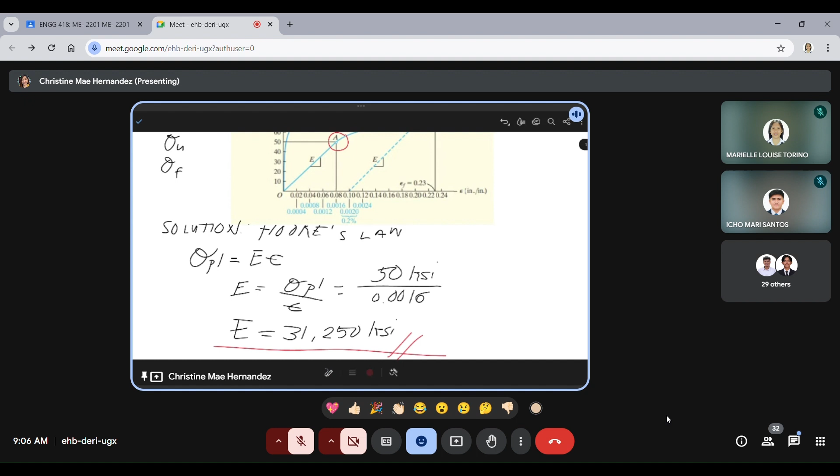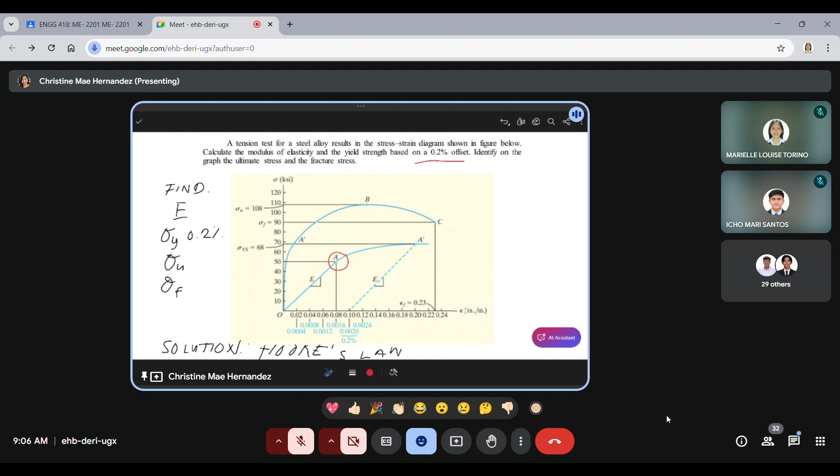Okay, next. Yield stress or yung ating yield strength based on 0.2. So sinabi naman na 0.2%. Di ba after proportional limit, pag sa yield strength, yun ay malapit na sa or tatawid na sa plastic region. So ano yung yield strength based on 0.2? Based sa graph ulit, ito, A prime. So nakalagay naman na itong 0.0020 is naka-offset na siya ng 0.2%. So lagay lang natin na 68. So yun na yung answer, 68 KSI. So base lang tayo sa graph, no? Madali pa lang, tingin-tingin lang tayo sa graph.

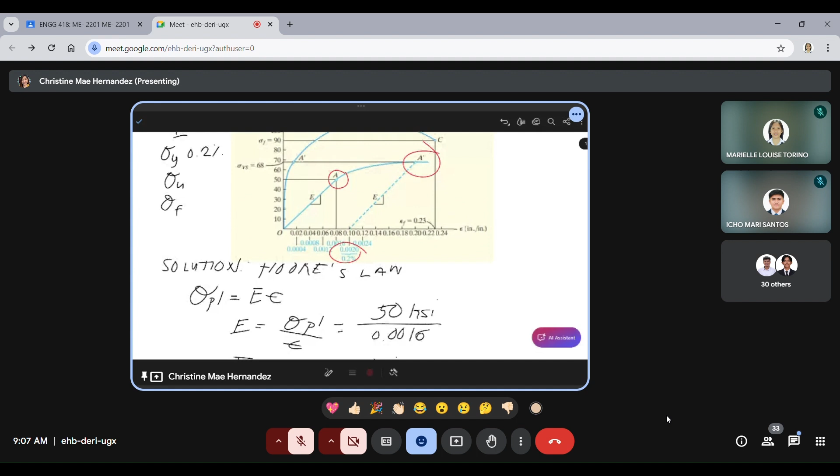Next, ultimate stress. Pag sinabing ultimate stress, maximum load, maximum stress, ano yung pinakamataas na value dito sa graph ng stress? So ito yung stress, di ba? Ano yung pinakamataas? Point B. So yun yung ating answer for ultimate stress, yung maximum load na nakakarry ng ating material. So, 108 KSI.

Next, fracture stress. Pag sinabing fracture stress, ito na yung end ng graph. Okay, sira na yung ating material. Pag itong stress na to, 'di ba, nag-ultimate siya, tapos bumaba na siya kasi malapit na siyang magsira kasi nagne-necking na siya. So kumbaga ito yung end point ng ating graph. Alin ba dito yung end point? Yung point C. Okay, so ito na yung pinaka-last. So, point C, fracture stress is equal to 90 KSI.

Okay, so ito lang yung ating problem number 1. May isa tayong kinompute using Hooke's law kasi sa elastic region lang, and yung iba based on graph lang. So, may questions ba? Clarification sa first problem?

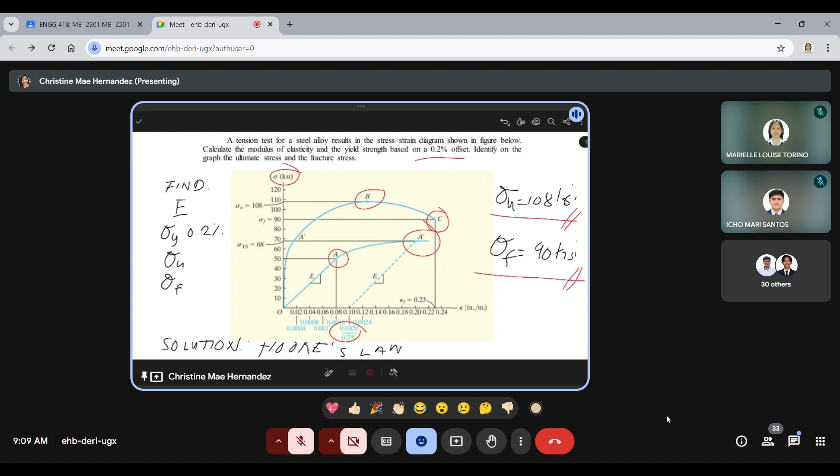Next. An aluminum rod shown in figure A has a circular cross-section and is subjected to an axial load of 10 kilonewton. If a portion of the stress-strain diagram is shown in figure B, determine the approximate elongation of the rod when the load is applied. Take the modulus of elasticity as 70 GPa.

Find. So, ang unknown natin is yung elongation lang ng ating rod. So, solution.

So first, ano bang formula for deformation? Di ba meron tayong formula na deformation is equal to strain times the original length. So, original length, given naman siya, check. And yung ating strain, nawawala.

So pwede nating computein yung ating strain using, ano bang formula for strain? Pwede siyang stress is equal to modulus of elasticity times strain. So ito yung unknown, 'di ba? Dito yan. Then modulus of elasticity, meron namang given. So check. Ano nawawala?

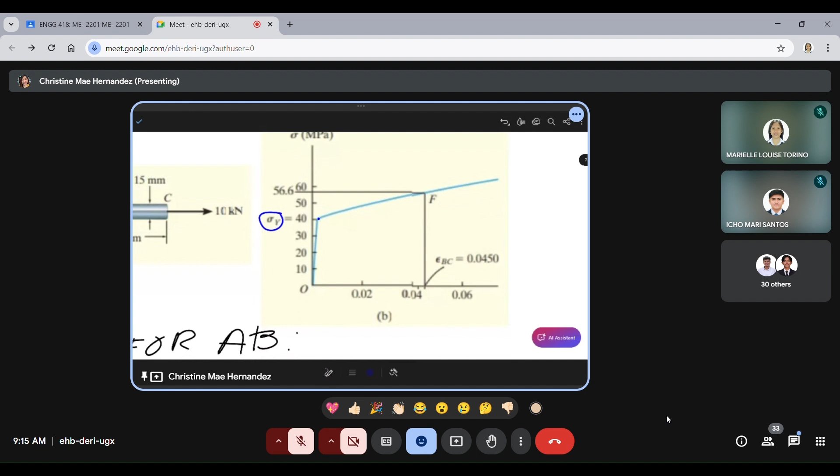31.83 MPa, yun yung nakuha nating value, less than sa yield stress natin na 40. Diba? So anong gagawin mo? Applicable dito yung Hooke's Law kasi nasa elastic region siya. So using Hooke's Law, so ito yung Hooke's Law. Nailagay ko na itong stress is equal to modulus of elasticity times strain. So Hooke's Law to. Ang Hooke's Law ay pang elastic region lang.

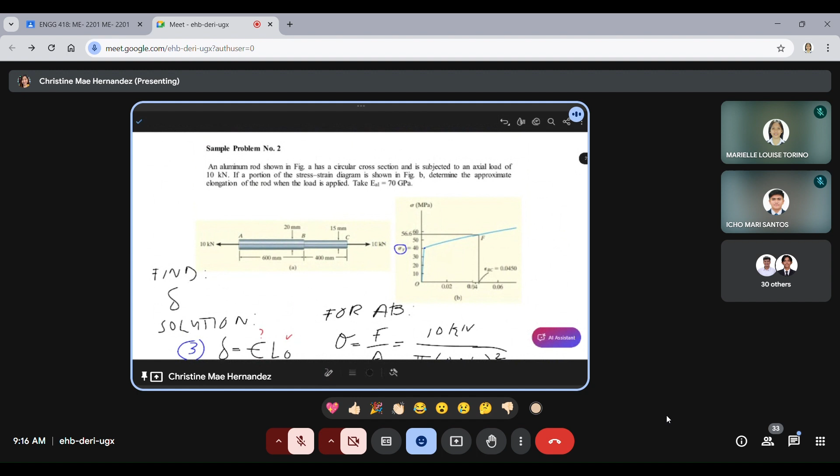So stress, 31.8309 is equal to over yung ating modulus of elasticity, which is yung 70 GPa. So given naman yung ating modulus of elasticity, 70 GPa. So convert natin into MPa para parehas yung ating unit.

So strain is equal to 4.54... 7271429 times 10 raised to negative 4. Tama ba? Hindi ko sure kung 34 to or 70 or 54.

Okay, next, nakuha na natin yung ating strain. So pwede na natin makuha yung deformation AB. Nasa step 3 na tayo dito, step 3, check. Deformation ng AB is equal to strain times yung ating original length. 4.54727142 times 10 raised to negative 4 times yung original length ng AB, sa AB lang, 600 mm.

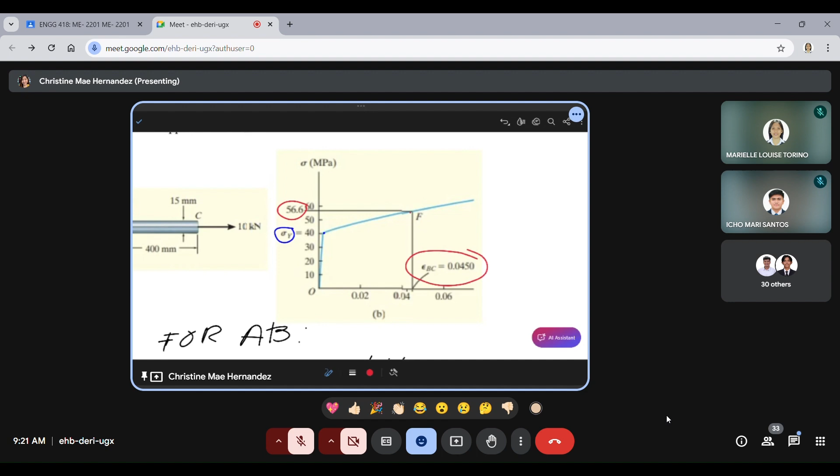So sa halip mag-compute ka using Hooke's Law, diba? Kinompute natin yung strain gamit ang Hooke's Law formula, given na yung ating strain sa graph na 0.0450. So pwede na natin ma-compute yung deformation at BC, using yung strain BC times yung ating original length. So 0.0450 times original length BC, so meron tayong 400 mm.

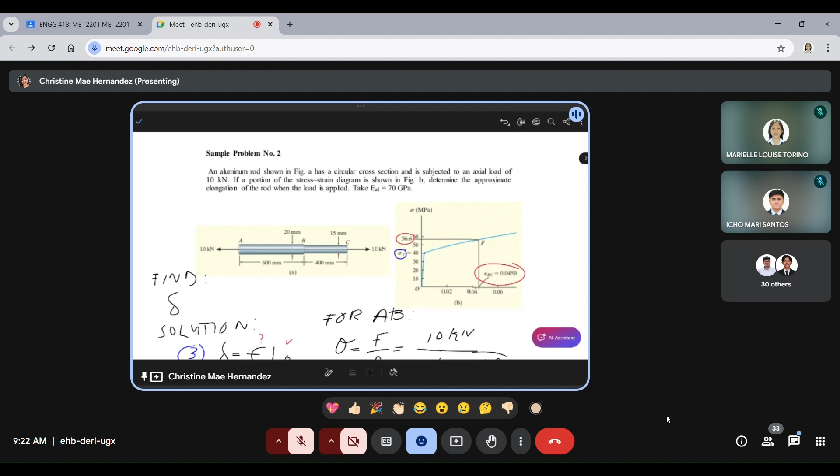So, total deformation at AB is 0.272836... mm, plus the deformation at BC which is 18 mm. So, the total deformation is equal to 18.2728 mm.

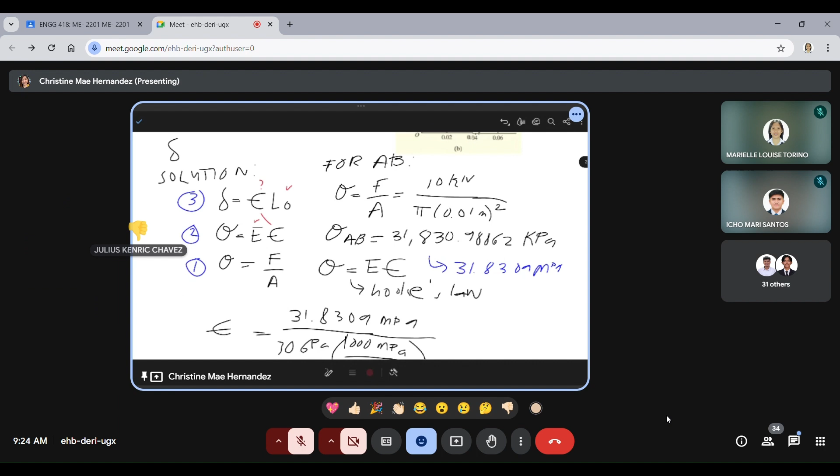Okay, same type of problem. A bar made of A36 steel has the dimensions shown in the figure below. If an axial force is applied to the bar, determine the change in its length and the change in its dimensions after applying the load.

The material behaves elastically. It's given that the modulus of elasticity is 200 GPa and the Poisson's ratio is 0.32. So, for steel too. Yes, steel and steel.

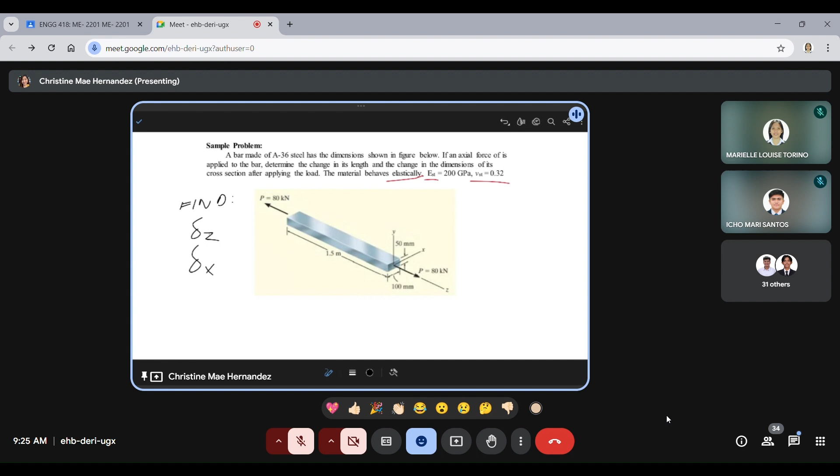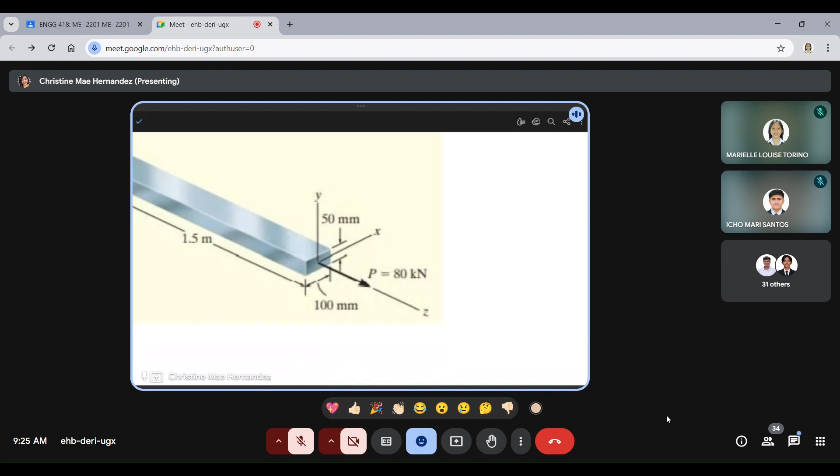So, find the change in its length. When it's change in length, let's call it deformation Z, since there's also change in dimension here. Change in dimensions, that's X and Y. Let's zoom in on the figure. Deformation at the Z-axis, deformation at the X-axis, and deformation at the Y-axis are what we're looking for.

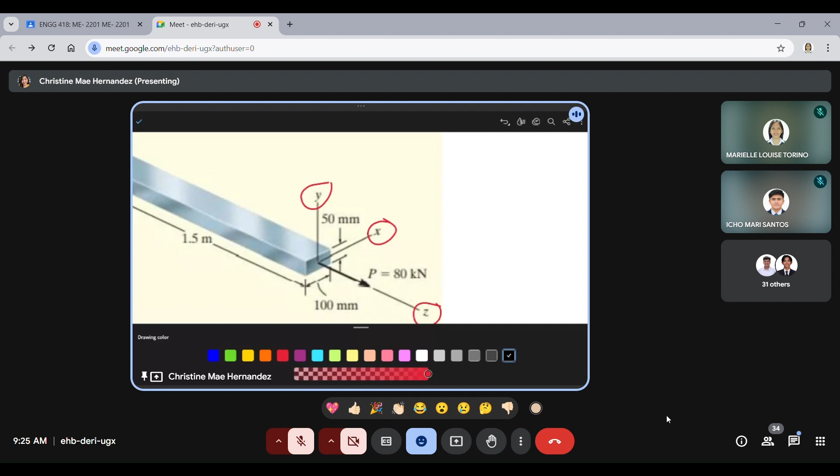So, solution. Deformation again is what we're looking for. Deformation is equal to strain times the original length. That's our first step. Sorry, this isn't actually first. This is third, this is the last step. Okay, we'll get to that later.

Second, we have the original length. So the strain is missing. Since the material behaves elastically, we'll use Hooke's law. Hooke's law states that stress is equal to modulus of elasticity times strain. Then, how do we get the stress? Stress is equal to force over area.

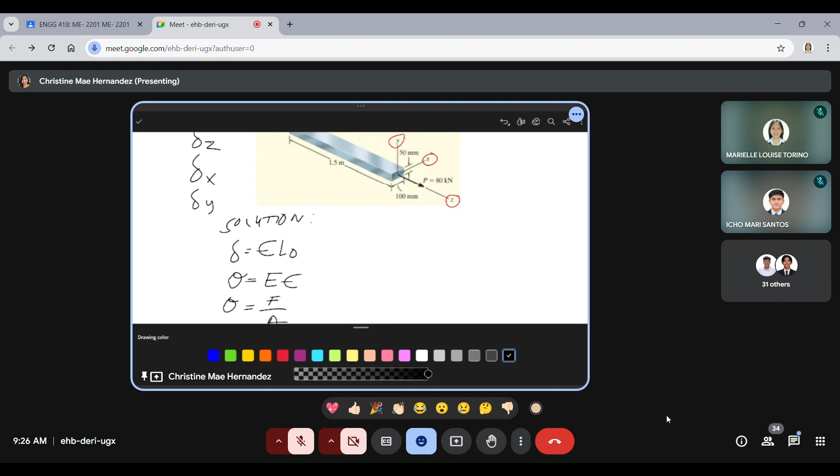Step 1, step 2, step 3. First step, stress, which is force over area. Our force is 80 kilonewton. And the area we're using here is the one perpendicular to our force, right? Perpendicular is what we use. So it's 0.1 meters, this is 100 mm times 50 mm.

So our stress is equal to 16 MPa.

Next, we already got our stress. Step 2 is strain using Hooke's law. Strain is equal to stress over the modulus of elasticity. So, 16 MPa, let's convert it to Pascal since our modulus of elasticity is in GPa. Times 10 raised to 6 Pascal, over 200 times 10 raised to 9, since it should be GPa, we converted it to Pascal. So strain is equal to 8 times 10 raised to negative 5. Okay, we're done with step 2.

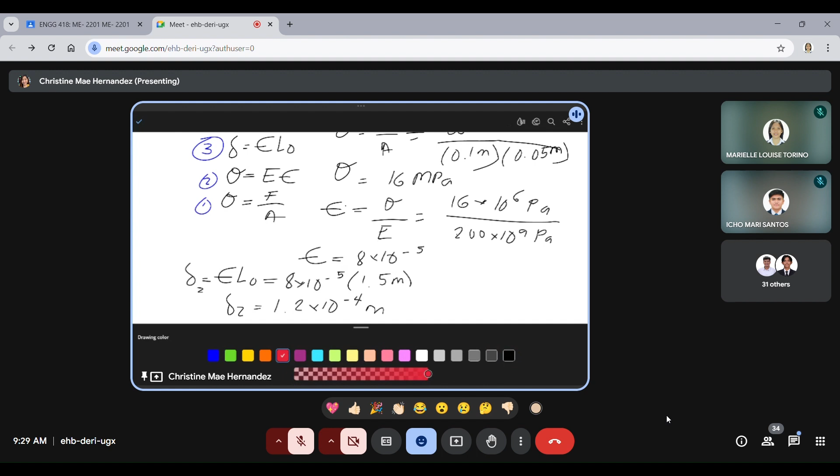So we've computed one unknown, which is the change in length. Now, what's being asked is the change in dimensions. The dimensions are X and Y. Now, we have a given Poisson's ratio of 0.32.

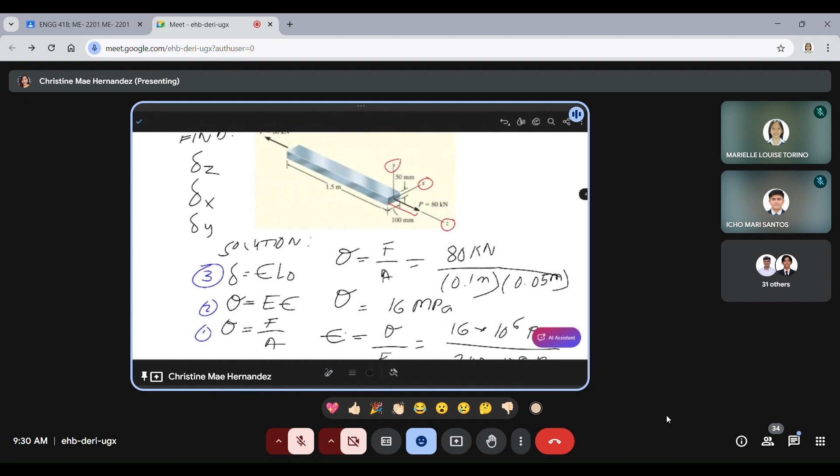So, right, the Poisson's ratio formula is equal to negative lateral strain over longitudinal strain. So here, negative. Lateral, so which is our lateral? That's the X and Y. Right, X and Y are our lateral. So strain X and Y over the longitudinal. So what's our longitudinal? That's our Z direction, or our length. Right, length, longitudinal, so Z.

So, substitute the given values. 0.32 is our Poisson's ratio, minus X and Y, the lateral strain, over the longitudinal strain. We already computed our longitudinal strain earlier, here it is, at 8 times 10 raised to negative 5.

8 times 10 raised to negative 5. So makakompute natin yung ating strain X and strain ng ating Y. So is equal to negative 2.56 times 10 raised to negative 5.

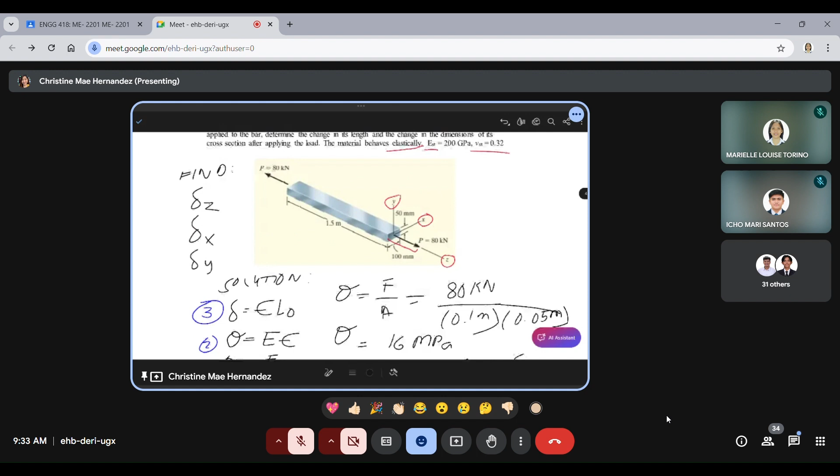So nakuha na natin yung deformation in x-axis. So y-axis naman, deformation at y-axis is equal to strain ng y-axis din times yung original length mo ng y-axis. So negative 2.56 pa din times 10 raised to negative 5. Kaya parehas kasi lateral yung sa atin. Times original length ng y, which is 100 mm, so 0.1 meters. At deformation at y-axis is equal to negative 2.56 times 10 raised to negative 6 meters.

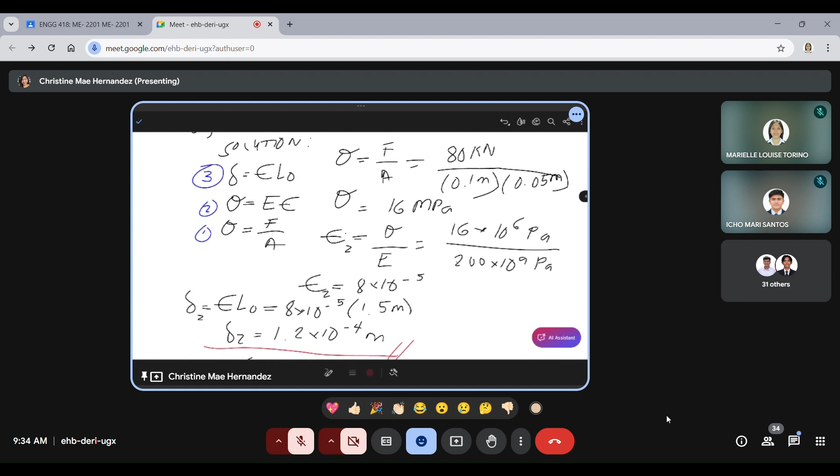So nakuha na natin yung deformation ng ating z, x, and y axis. Unahin nyo lang yung step 1, 2, 3. Then kung ang tinanong naman ay lateral, okay, pag lateral na siya gagamitin nyo yung Poisson's ratio. If wala yung Poisson's ratio, meron din tayong pag given naman yung G, yung shear modulus naman, meron tayong relationship dyan. G is equal to modulus of elasticity over 2 times 1 plus Poisson's ratio. I think next problem natin magagamit yan.

Okay, questions or clarifications para sa problem number 3.

Yes po. Ma'am, if yung X and Y face naman po natin ay slanted, meron po ba siyang ibang formula po yung sa Poisson's? Wala, so gagamitan nyo siya ng trigo. Laging trigo yung ano nyo, so medyo mahirap na pag inislant ko na siya. Yes po, so kailangan lang po na perpendicular po siya dun sa force po. Oo, yung basta yung force, diba, pag slant, basta laging perpendicular pag ang ginamitan ko ng slant. So trigo lang tayo, yun. Ganun lang. Noted po ma'am. Thank you po. Okay, may questions pa?

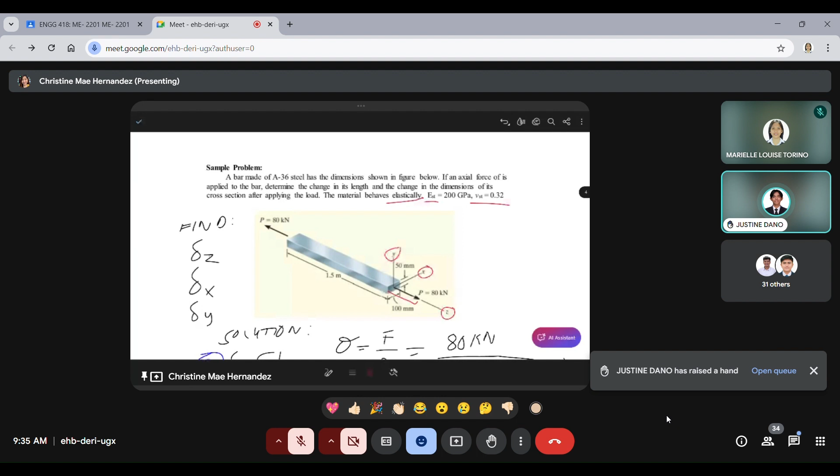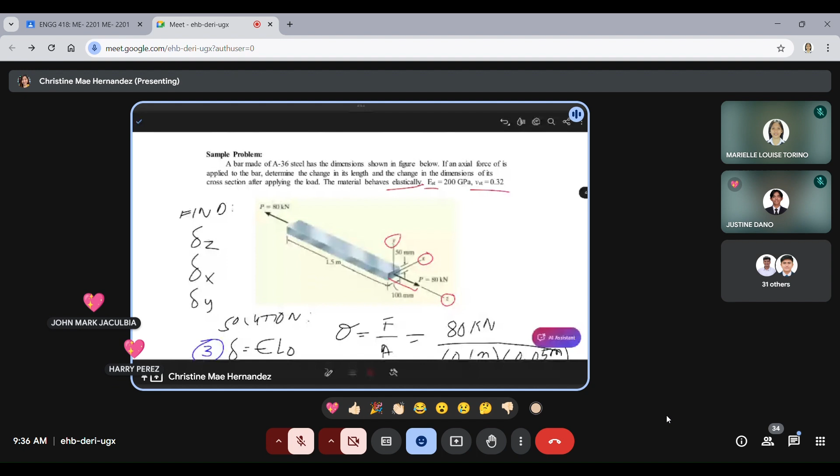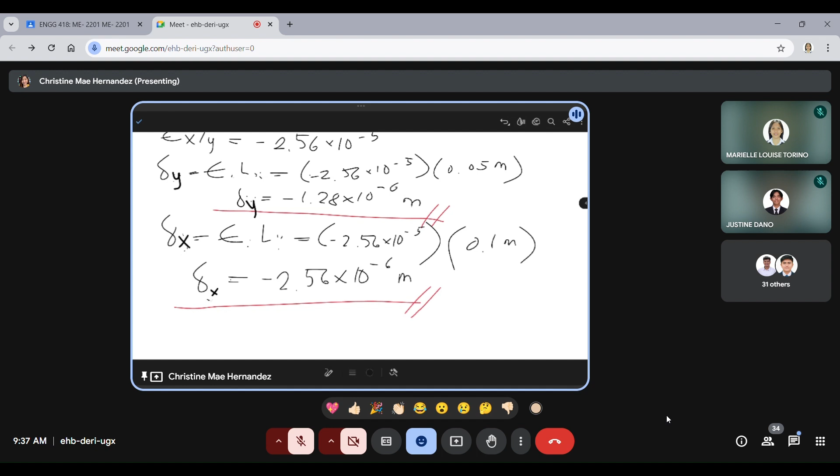Yes po. Ma'am, hindi po ba ang length ng X ay yung 100, sa Y po ang 50? Natin, length ng X ay 100 and sa Y ay, oo sorry nagkabaliktad ako. Sige, tama ka. X ay 100, Y ay 50. Okay, so mali, baliktarin lang natin, sorry na. So X... Ito ay 0.05, so X yung 100 mm. X then Y. Okay, questions pa? Questions? Clarifications? So wala na, okay, so next problem.

Okay, so a specimen of titanium alloy is tested in torsion and the shear stress strain diagram is shown in figure A. Determine the shear modulus G, the proportional limit, and the ultimate shear stress. Also determine the maximum distance D that the top of a block of this material, shown in figure B, could be displaced horizontally. So if the material behaves elastically when acted upon by a shear force V, what is the magnitude of V necessary to cause this displacement? So find...

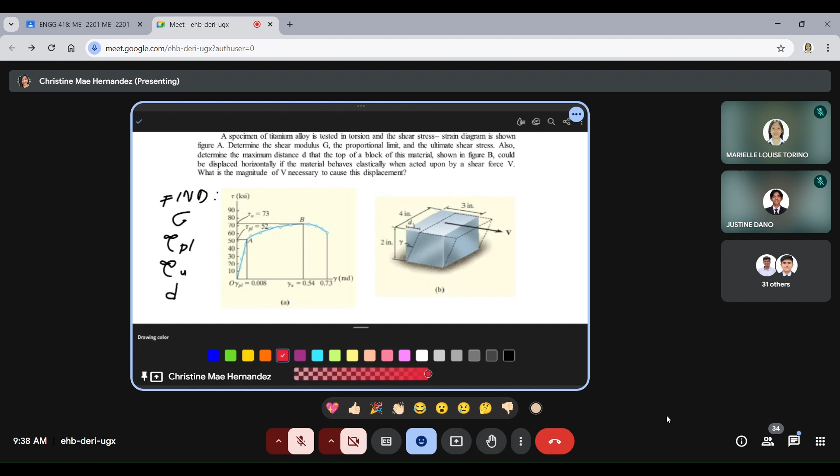Shear modulus G, okay sa shear na tayo. Then proportional limit, so shear to proportional limit, and yung ating ultimate stress or ultimate shear stress. Also kailangan din daw nating hanapin yung maximum distance D, okay, pag dinisplace natin siya horizontally na nag-behave elastically. Okay so meaning elastically, exert tayo ng force V, pag inalis natin yung force V, bumabalik sa original shape, sa original size, and sa original length. And lastly, yung ating unknown is yung magnitude of V.

So ito yung shear force. First, solution. So di ba meron tayong formula na stress is equal to shear modulus times shear strain. Okay, pang shear to, di ba? Kanina pag normal, stress is equal to modulus of elasticity times strain. Eh ngayon ito pang shear. Shear. Okay.

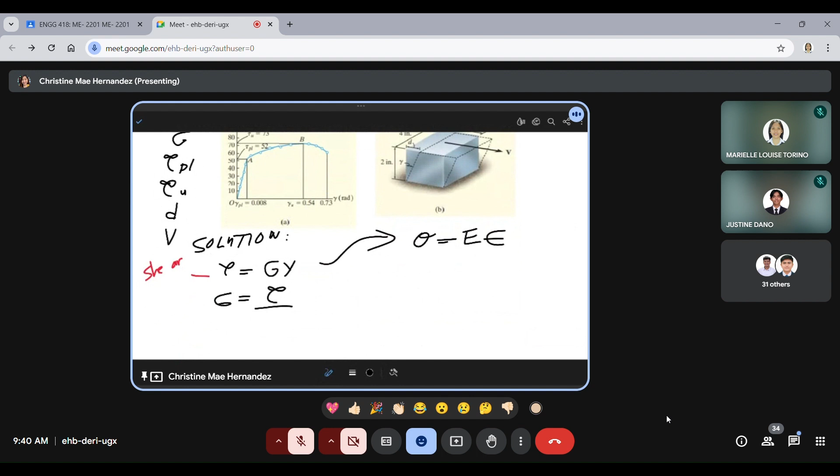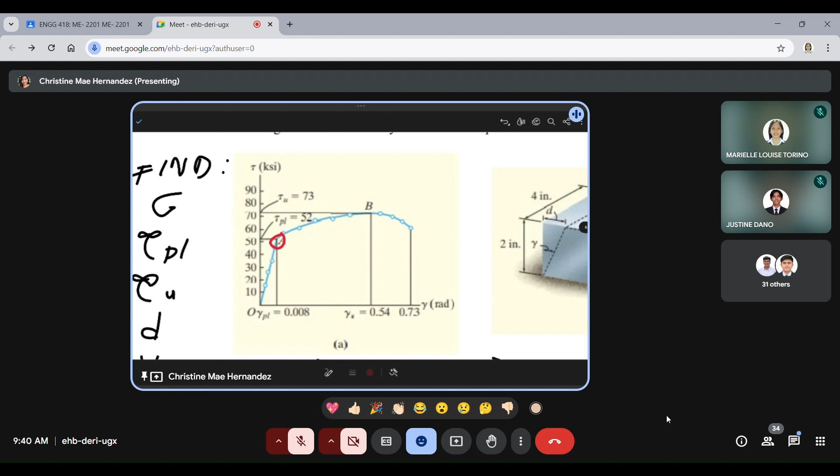So modulus or shear modulus G, ano ba yung shear modulus G na yon? Di ba siya ay pang elastic region, kumbaga parang Hooke's law din to, di ba, Hooke's law din, pang elastic region din siya. Okay, so dito, elastic region, G is equal to tau over yung ating strain. So yung tau natin sa elastic region, zoom in natin yung ating figure. So alin dito yung proportional yung ating stress dapat at yung strain. So ito yung point A, diba, point A. So dito sa point A, ano ba yung tau natin? 52 KSI, so nakalagay na naman na 52 KSI. So proportional limit natin, 52 KSI.

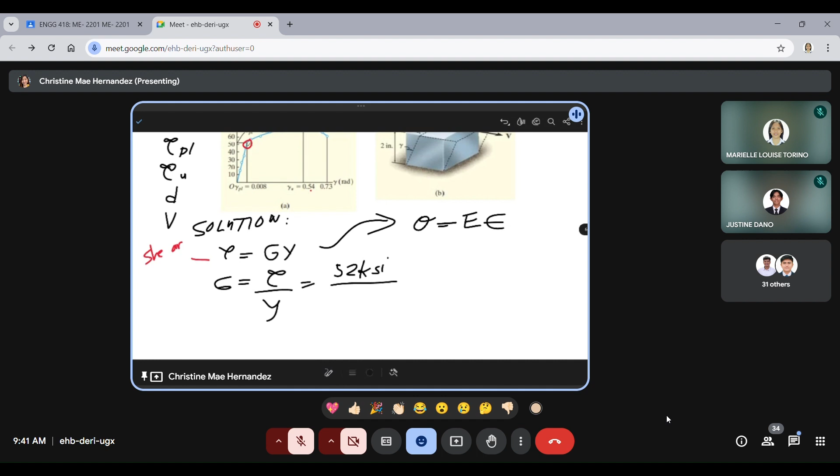Over the strain, so 0.008. So, shear modulus G natin ay equal sa 6500 KSI. Next, we have yung ating proportional limit.

Compute na natin yung G. Proportional limit based sa ating graph. So nakita nyo naman, ano ba? Given na yung 52, so yun na yung answer natin, 52 KSI. Diba? Madali lang yung chapter 5.

Next, ultimate shear stress. Pag sinabing ultimate, siya yung pinakamataas. Diba? Pag naman fractured stress, yun yung pinaka-end na, katapusan na ng ating strain, sa stress strain diagram. Eh pag itong, ang tanong, ultimate stress - pag sinabing ultimate stress, siya yung maximum stress. So alin ba dito yung may maximum stress? Itong ating point B. So ang ultimate stress ay, ito, given na din, 73 KSI.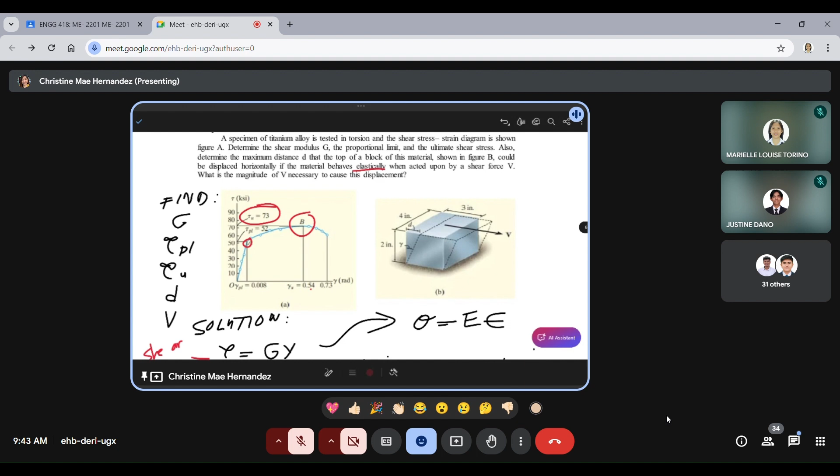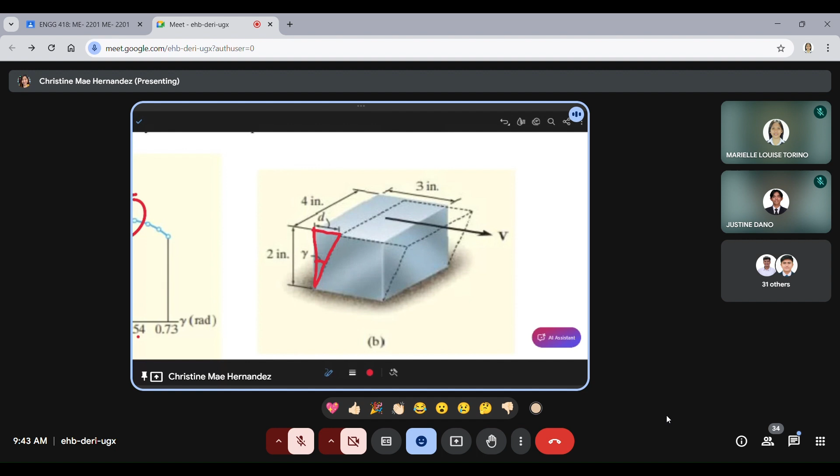Okay, next. So ano naman daw yung distance or maximum distance na na-displace ng ating block pag nag-behave siya elastic? Okay, so dito, D. So diba ito yung ating figure? Trigo ulit tayo. So trigo, we have distance D. Meron akong distance na 2 inch. And meron naman akong strain, shear strain. So bakit? Paano ko nalaman yung shear strain?

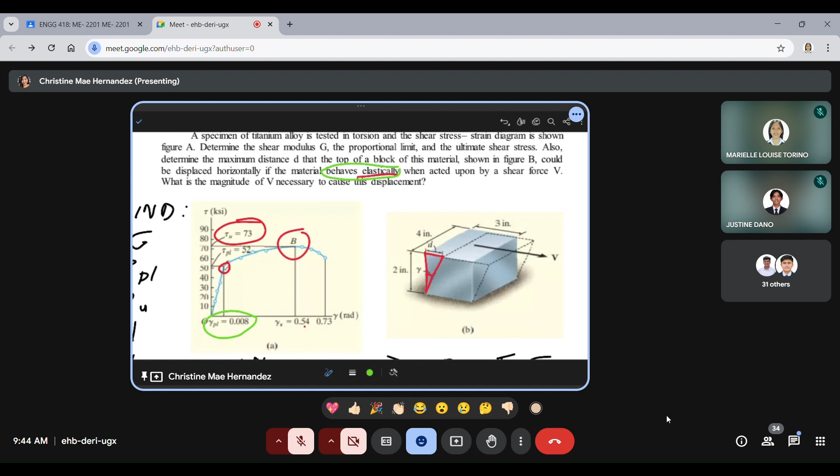So redraw ko lang yung ating triangle. Two inch. And ito yung distance. So sa shear strain, may given naman tayong shear strain. Bakit? Kasi ang sabi dito sa problem, material behave elastically. So alin ba yung nasa elastic region na strain? Siya ay itong 0.008. Diba? Pang elastic region lang to. Eh sinabi naman sa problem, behaves elastically.

Okay, so ito yung gagamitin natin. TOA, tangent, 0.008 rad, nakarad to, kaya i-convert natin siya sa angle, is equal to opposite D over 2 inch. So ang ating distance is equal to 0.016 inches.

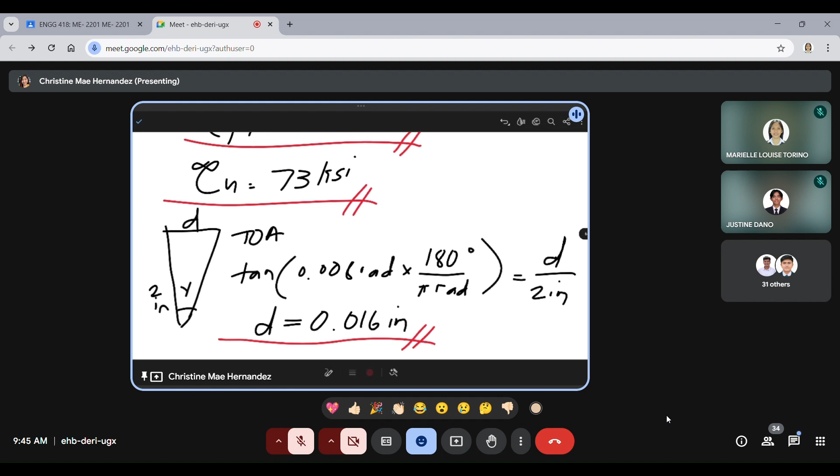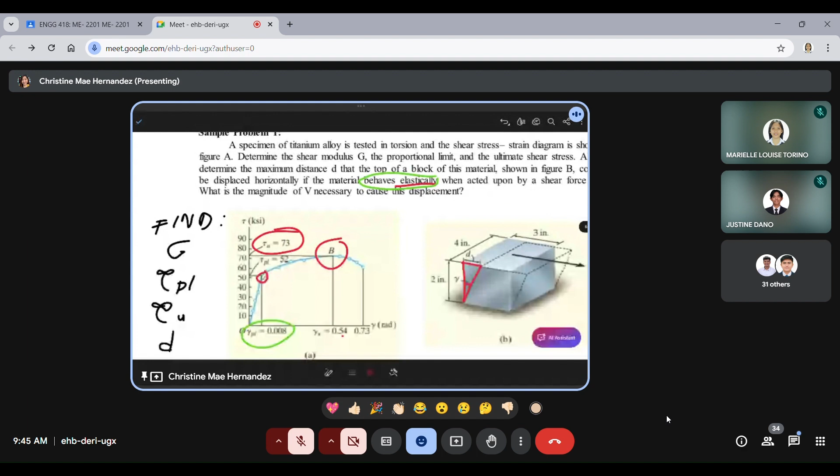So kinonvert natin yung nakuha natin na sa graph na 0.008 rad, kasi dito sa TOA, need dapat na naka-degrees siya. Kaya kinonvert natin yung rad to degrees. So ito na yung ating maximum distance ng material, diba? Pag nagbe-behave siya elastically, meaning elastically, babalik pa rin siya sa original distance or shape or length niya. Okay, last.

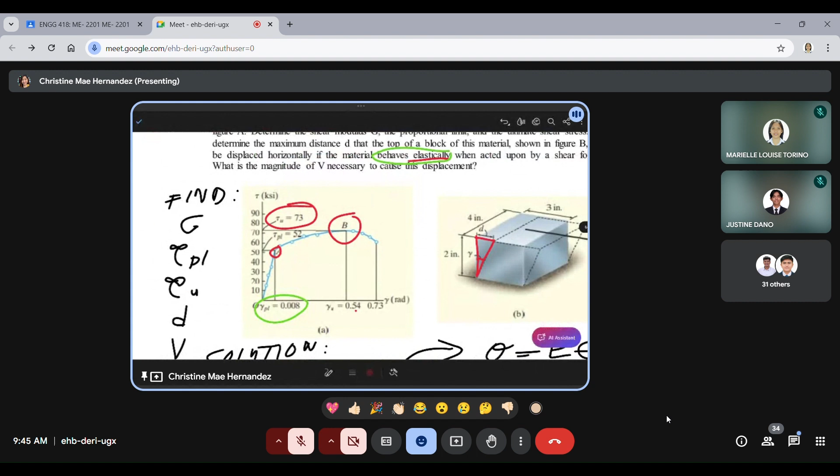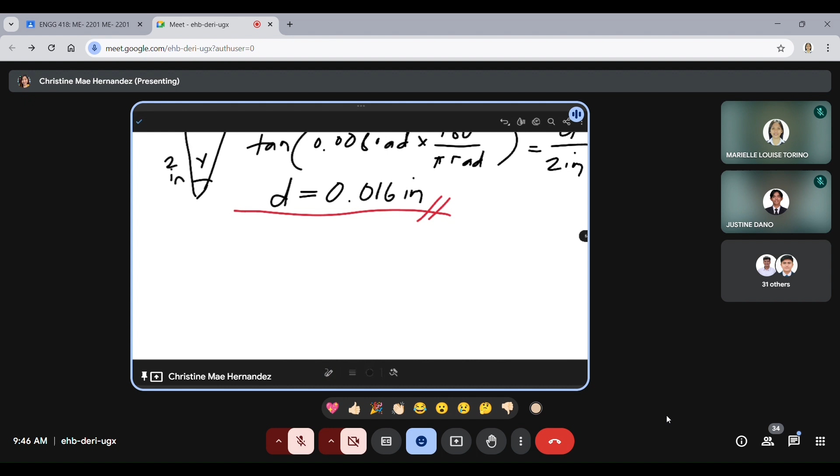Ano naman daw yung magnitude V necessary to cause this displacement? So meron tayong formula na shear stress is equal to force over area. So force is equal to shear stress times area. Shear force is equal to tau. Ano ba tau? Yung ating proportional limit pa din, 52. Diba? 52, kasi sabi elastically daw, 52 KSI times yung ating area na 3 inch.

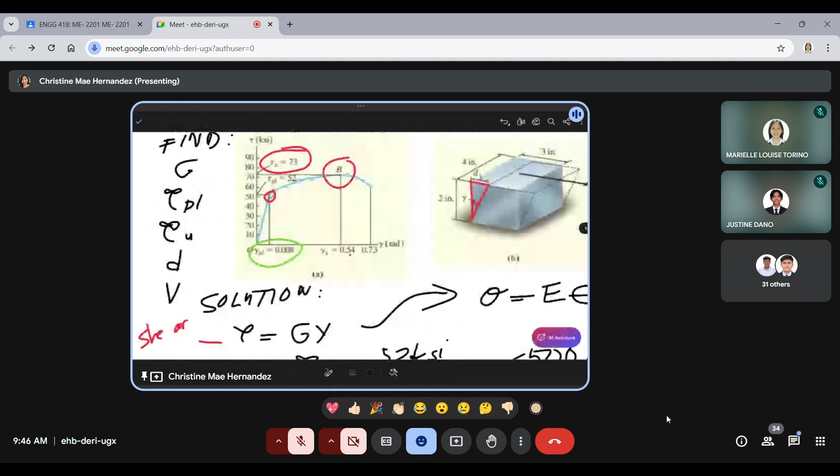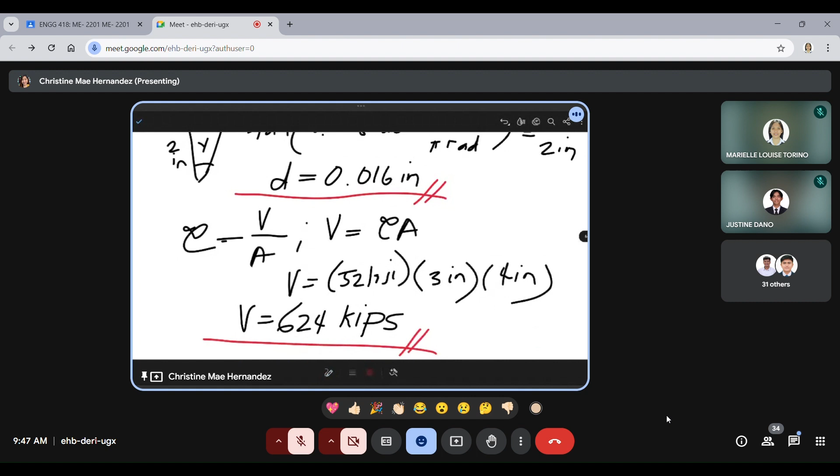So elastic, meaning bumabalik, diba? Bumalik ulit siya. 3 inch times 4 inch. So shear force is equal to 624 kips. So na-compute na natin yung unknown sa problem. So madali lang to kasi based lang siya sa graph minsan.

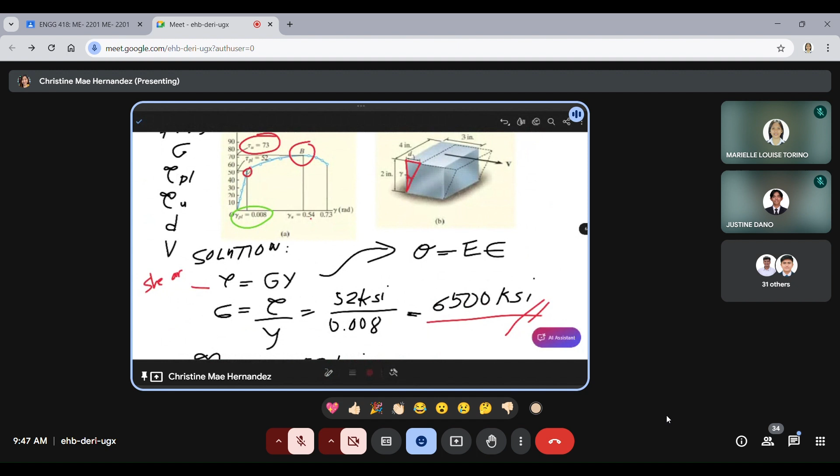So nakakatuwa if yung mga question is nasa plastic region, kasi magba-base ka lang sa graph. Okay, questions, clarifications for problem number 4.

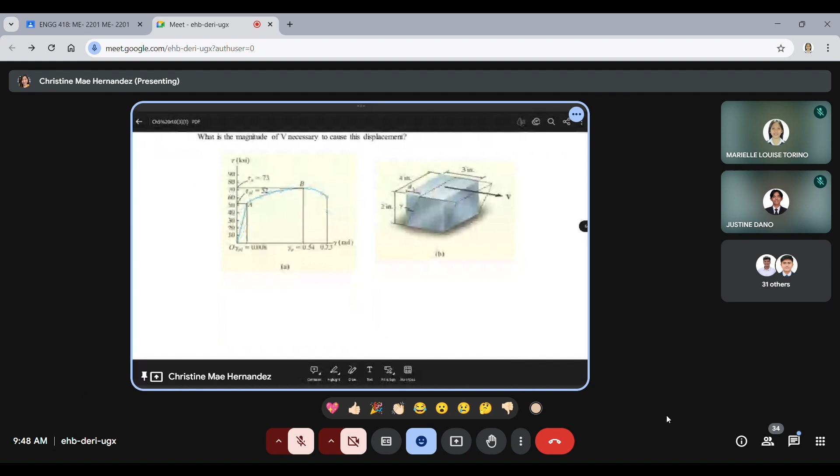Okay, nawala yung mga solusyon natin. Sige, proceed ako dito sa next problem. An aluminum specimen shown in figure has a diameter of 25 mm and a gauge length of 250 mm.

So if a force of 165 kilonewton elongates the gauge length of 1.2 mm, determine the modulus of elasticity, also determined by how much the force causes the diameter of the specimen to contract. So take G or the shear modulus 26 GPa pang aluminum and yield stress na 440 MPa.

So draw, find - the first is modulus of elasticity. Next ay yung ating determined by how much the force causes the diameter to contract. So deformation. So nung una natin, solution.

So para makuha yung ating modulus of elasticity, so anong ginagamit natin? Sa stress, yung Hooke's law, is equal to modulus of elasticity times yung ating strain. So yung strain, wala tayong strain, diba? So ang strain natin, paano makukuha? Using the deformation is equal to strain times the original length.

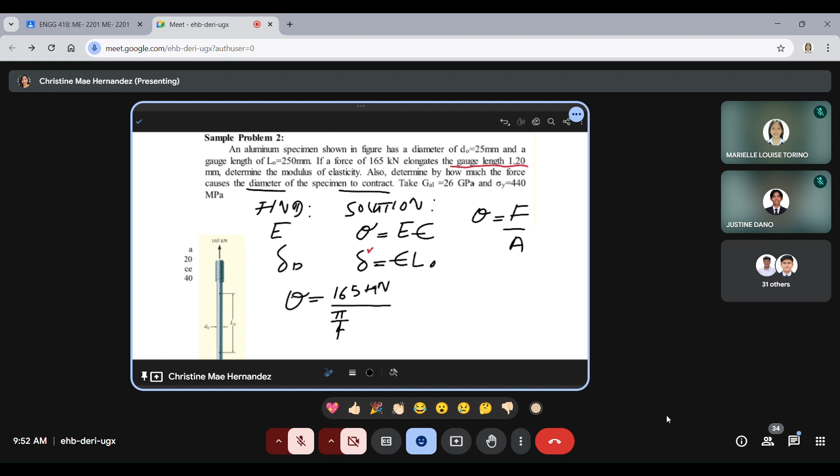Force over area. So, 165 kilonewton over area. Pi over 4, diameter to, 25 mm, squared. Stress is equal to 336.1 MPa.

Ngayon, kukunin natin yung strain para makuha, masubstitute natin dito sa formula sa Hooke's law. Nakuha na natin yung stress, diba? Ngayon, kukunin natin yung strain para makuha natin itong unknown, yung modulus of elasticity.

Strain is equal to deformation over the original length. So given yung ating deformation na 1.2 mm over yung ating original length daw na 250 mm. So ang ating strain ay equal sa 0.0048.

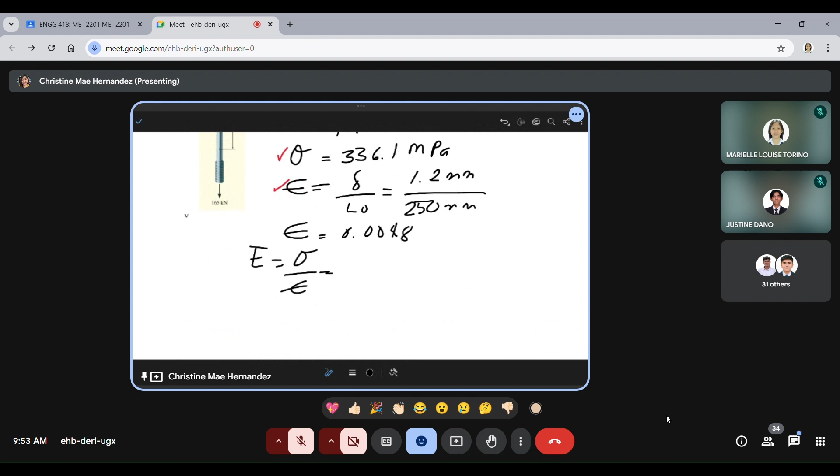Next, pwede na natin makuha yung ating modulus of elasticity using Hooke's law. Stress over strain is equal to 336.1 MPa over 0.0048. At ang ating modulus of elasticity is equal to 70 GPa.

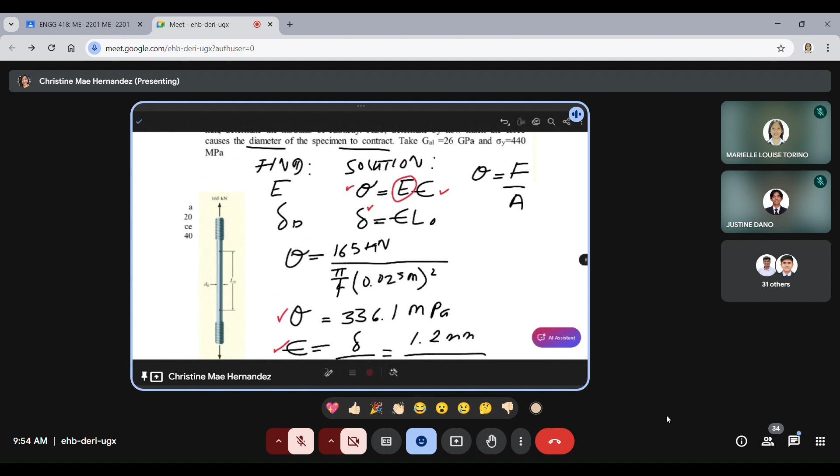Okay, so binaliktad lang natin to since nag-iba yung ating unknown. So yung unknown natin kanina is deformation. Sa previous problem dito, modulus of elasticity naman. Next, deformation daw ng diameter naman. So kanina, length naman yung given dito. Ngayon, diameter yung hinahanap. So di ba meron tayong formula kanina.

Kanina, ang ginamit natin is yung Poisson's ratio na merong negative epsilon lat or lateral strain over epsilon long or longitudinal strain. Ngayon, wala tayong given na Poisson's ratio. Diba? Wala naman tayong given na Poisson's ratio. So ang gagamitin natin is yung relationship ng shear and elastic modulus.

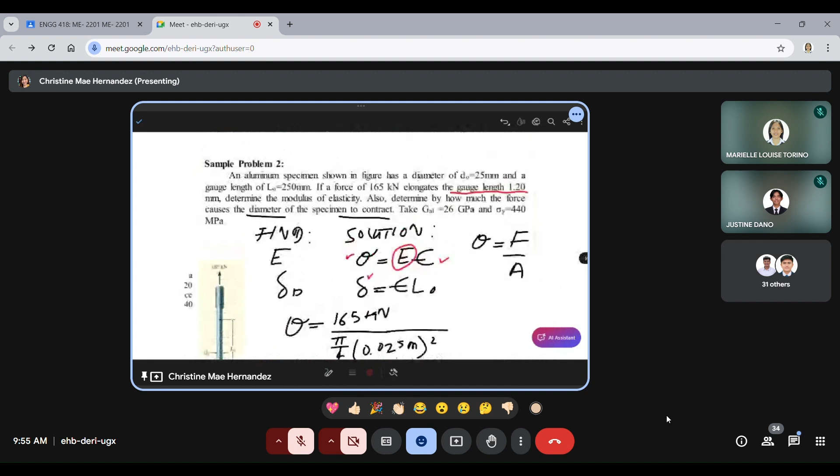So may relationship sila. E is equal to 2G times 1 plus Poisson's ratio. Kasi tingnan natin, given ba yung E natin? Yes po, kakakompute lang natin. Given ba yung G natin? Opo, ito daw G ng aluminum, yung 26 GPa. Check.

Mako-compute na natin yung ating Poisson's ratio. So, 70 GPa is equal to 2 times 26 GPa times 1 plus Poisson's ratio. So Poisson's ratio is equal to 0.347.

Pwede na nating i-substitute kasi longitudinal kanina, di ba? Yung given, yung 1.2 mm. Yung lateral naman yung hinahanap natin. Poisson's ratio 0.347 is equal to negative E lateral or lateral strain over yung ating longitudinal. So longitudinal natin, yan, na-compute na natin kanina, ito.

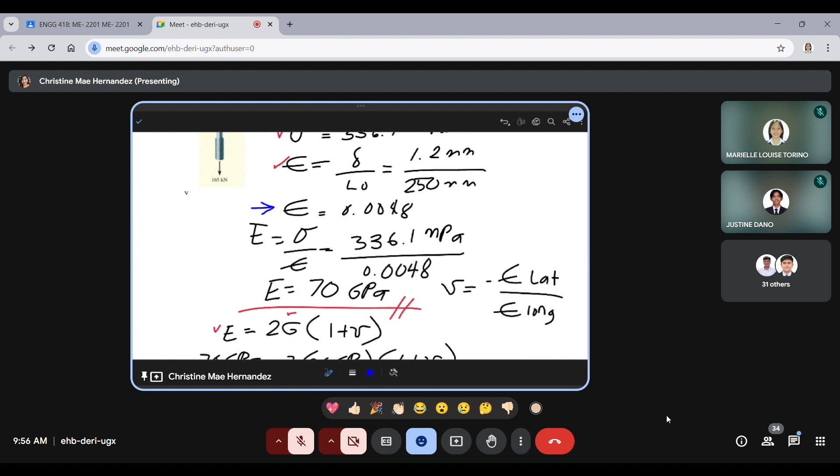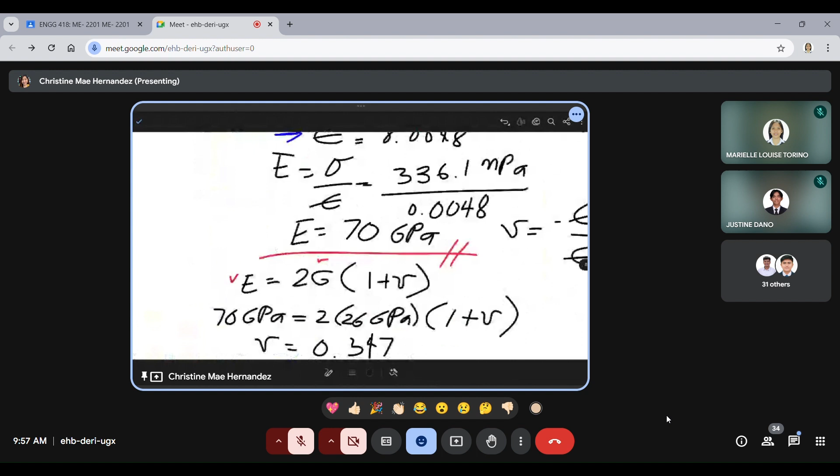May check, ito siya, 0.0048. So ang ating lateral strain ay equal sa negative 0.0016. Next, deformation is equal to negative 0.0016 times yung ating original diameter na 25 mm, times yung ating lateral strain. So for diameter to, negative 0.04 mm. So, contraction.

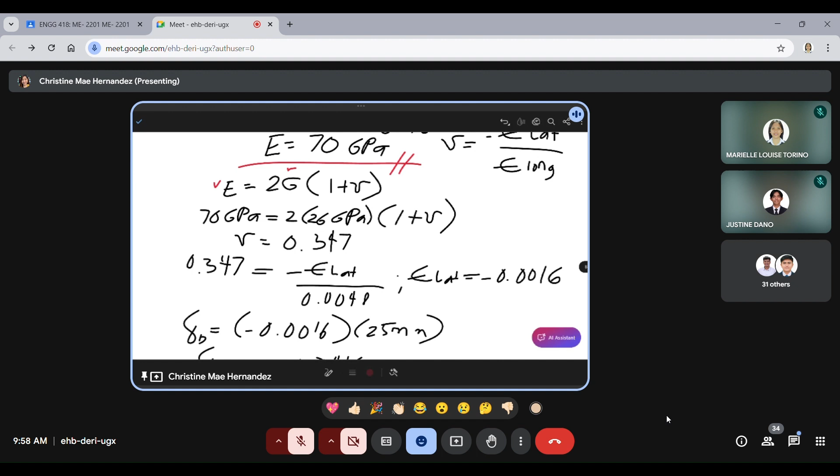Okay, gumamit tayo ng relationship ng shear and elastic modulus dito para makuha lang natin yung ating Poisson's ratio. Huwag nyo kakalimutan yung Poisson's ratio, negative ilat over ilong. Okay? Questions, clarifications?

Okay, next, last na to. Last problem. Madali na naman yung ating thin-walled pressure vessel. A cylindrical steel pressure vessel 400 mm in diameter with a wall thickness of 20 mm is subjected to an internal pressure of 4.5 meganewtons per m squared. Calculate the tangential and longitudinal stress in steel. So meron tayong mga given na diameter 400 mm, thickness 20 mm, internal pressure 4.5 MPa. Then calculate the tangential and longitudinal stress.

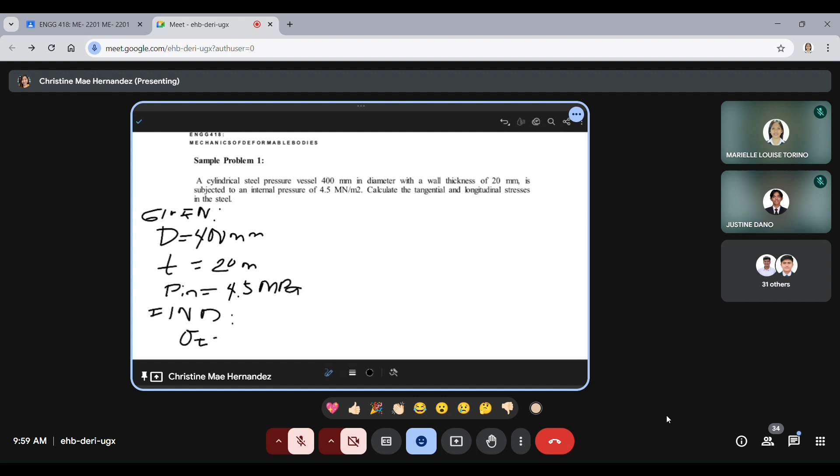So tangential, siya ay pressure times diameter over 2t. And pag longitudinal, siya ay pressure times diameter over 4t. So yun lang yung gagamitin mong formula. Substitute mo lang yung diameter, thickness, and yung ating internal pressure. Then mako-compute mo na yung tangential and yung ating longitudinal. So yun lang yung thin-walled pressure vessel natin.

Dalawa lang yung formula. So pag may joint efficiency, ita-times nyo lang sa denominator. And if ever may external pressure given, i-consider mo din yung external pressure. Ima-minus mo sa internal pressure yung external pressure. Ganun lang. Dalawang formula lang umiikot ang thin-walled pressure vessel. So any questions or clarifications for chapter 5?